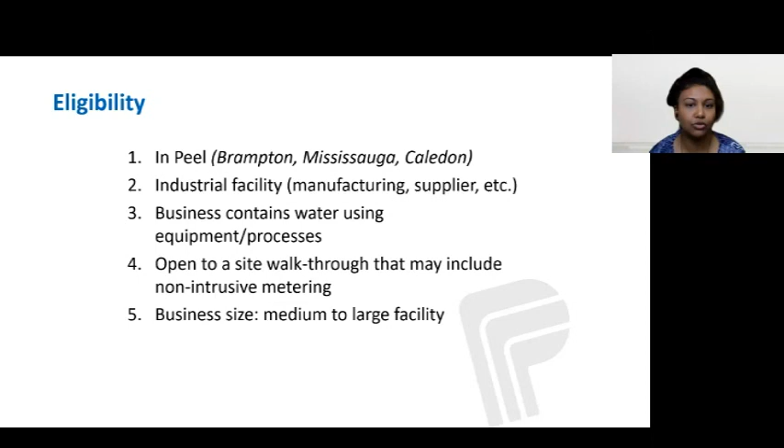Other eligibility requirements are that the facility must be under the industrial category for this specific program, meaning it's in manufacturing, food and beverage, or a supplier of some sort, just to name a few. The business is to contain water using equipment and processes, as our program does not look at energy specifically. And you must be open to a site walkthrough that may include some metering with a flow meter, which may stay at your facility for a few days, up to 2 weeks, depending on the operating hours. Finally, it must be a medium to large size facility. So those are our main requirements for this industrial program.

So if eligibility is confirmed, the application process can be summarized into 8 steps. First, someone from the industry must reach out to the region, either by email, by phone, or the online contact form I mentioned earlier. A virtual meeting will be set up to discuss the program, business details, and scheduling an audit with myself.

Next would be the actual audit on site, where myself and the consultant would meet with a facility staff member very familiar with your plant floor operation and equipment. Metering may occur and might be left on for a period of time. It's a non-intrusive meter, just a flow meter to get minute by minute data. Data will be gathered, and once those meters are picked up, the consultant will create a report highlighting all the findings and recommended water saving opportunities.

The report will be sent electronically for their reference to the business, and it's then up to the business to make any of those changes from the report. There's no specific deadline, but the region would just like to maintain some regular communication regarding your possible next steps. There's no actual obligation. It's really a stepping stone for businesses if they are interested in water efficiency but are just not sure where to start.

And then if the changes are executed, a second audit may be scheduled to determine your actual savings, and a second report would be provided at that time showing those actual savings. Finally, there is a social media option for cross promotion between the business and the region, whether it's through Twitter, LinkedIn, or Instagram, depending on the situation.

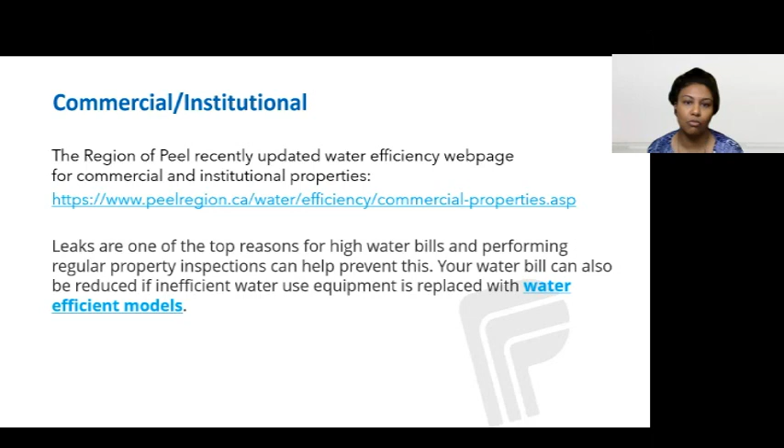So there are six pieces of equipment that we've seen get replaced most often in the commercial and institutional sector, and this is actually provided on our webpage. All the details are there, but I just wanted to go over it so you get a better idea of some of the recommendations we suggest based on what we've seen in the past. So let's start with the first three.

We have walk-in fridge freezer units or condensers, ice machines, and toilets. All of this information is provided on the webpage, but please note that all listed costs are approximate, as savings depend on the level of usage. The values are based on multiple sources spanning online resources, credible reports, manufacturing specs, and historic program data. The approximate values listed include money saved per year, the one-time investment cost, and the water saved per year. As you can see from this list, the average max investment is just under $4,000, with over 200 cubic meters of water savings per year, which can add up quite quickly and significantly.

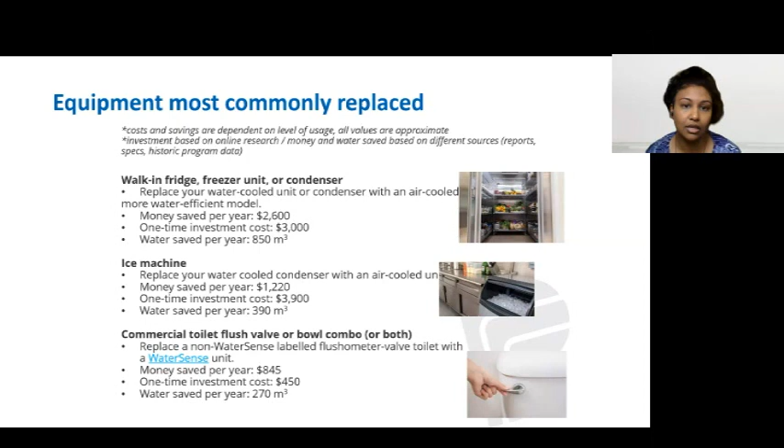So the next three most popular equipment that get replaced at these types of facilities include urinals, pre-rinse spray valves, and dipper wells. Pre-rinse valves, as well as dipper wells, are most commonly found in restaurants. As you can see from this list, the average max investment is just under $500 for this equipment, with over 15 cubic meters of water savings per year.

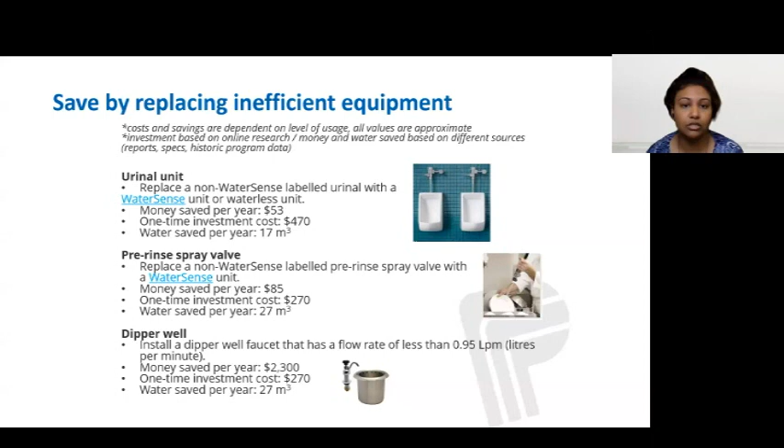You'll note that some of the equipment recommends changing to a WaterSense unit. This is a list of small, water-efficient products in an affordable price range for the vast majority, according to the EPA. The link is provided on our webpage. For example, if you have a certain type of toilet and you're thinking of replacing it, WaterSense products are actually very water efficient and proven to be so. They would be on that WaterSense list. Common brands would be, for example, American Standard and Kohler, just to give you an idea, and to verify those savings. The list also contains outdoor water-using equipment options such as sprinklers for your reference. So if outdoor water usage is a concern, there are some great options on that WaterSense list as well.

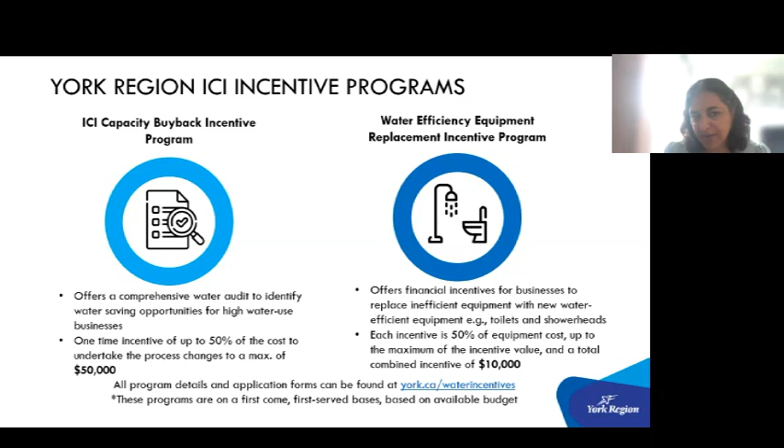Very quickly, I'd like to highlight that the Region of York offers a comprehensive water audit to identify water saving opportunities for high water use businesses through their ICI capacity buyback incentive program. They also offer a water efficiency equipment replacement incentive program, and you can find all the details on their website.

Toronto also has a capacity buyback program for the ICI sector, in addition to an industrial water rate and sewer surcharge rebate programs. Again, you can get more information on their website.

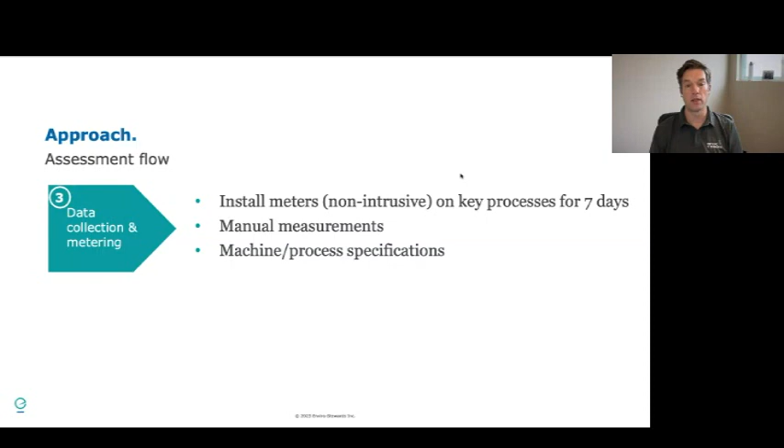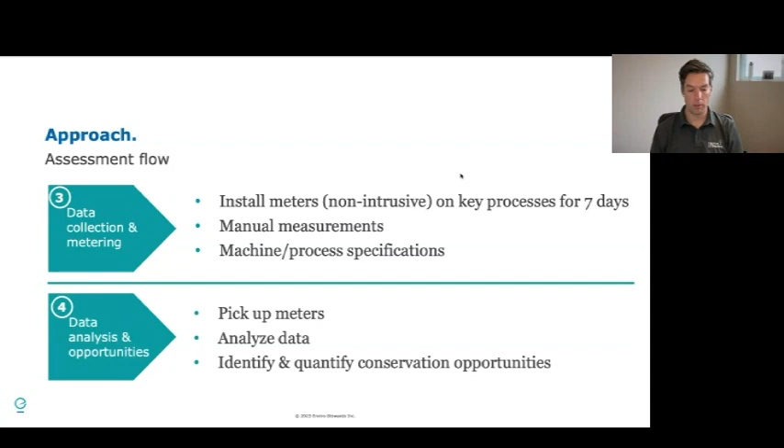We'll then pick up the meters, crunch the numbers, identify what you could change, and quantify what that will result in water savings. That'll be prepared, as Priya mentioned, in a summary report. We'll quantify the savings for you. The report is reviewed by Peel to make sure it meets the program, and then it'll be submitted to the facility. As mentioned, once you implement something, we'd come back and measure the after results. So that's a high-level overview of what to expect during an audit assessment through this program.

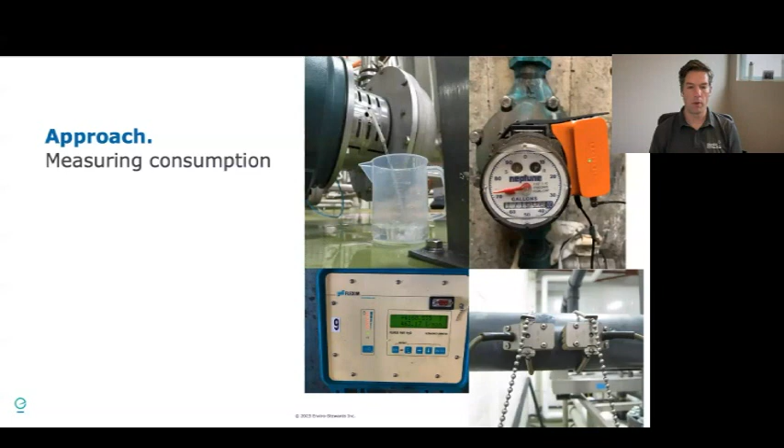So we'll take a look at some case studies, and the first one we're going to look at is Super-Pufft. I'll turn it over to Syed to run through these slides.

Hi, thank you, Lloyd. Hi, everyone. My name is Syed. I work at Super-Pufft.

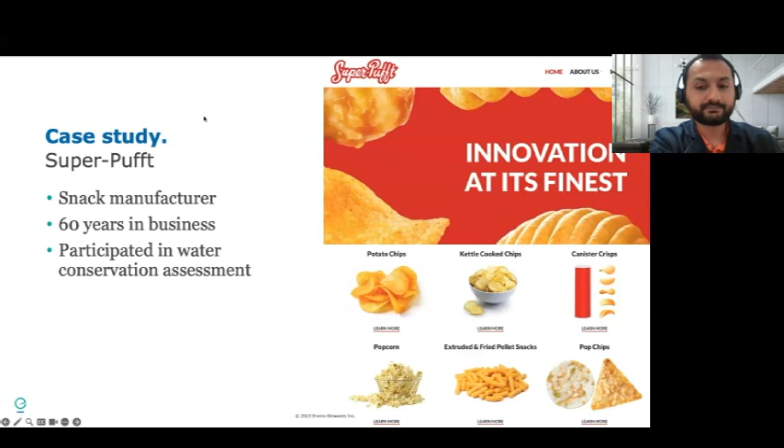I'm going to start with a brief introduction of Super-Pufft. We manufacture snacks, chips - there are a few products not on the slide that we recently expanded into, so now we also produce wafers, cookies, nutter butter wafers, things like that. We're one of the largest snack manufacturers, so obviously we use a lot of water in production as well. Enviro Stewards did a survey for our plant, and they found several places where we could save a lot of water. The 3 cases highlighted in this presentation are the ones we'll cover.

Before we start, let me give you a brief overview of what the process looks like, so you can understand how and why we are saving so much water.

When we make chips, the first thing we do is get potatoes from the fields, which are dirty, so we need to wash them. That uses most of our water. After that, we need to take the peels off, so they go through the peelers, slicers, then get fried and packaged. So the processing side uses quite a lot of water.

The three things that were found by Enviro Stewards were the slicers, the potato receiving jets, and the augers or destoners, which I'll get into when I'm explaining those.

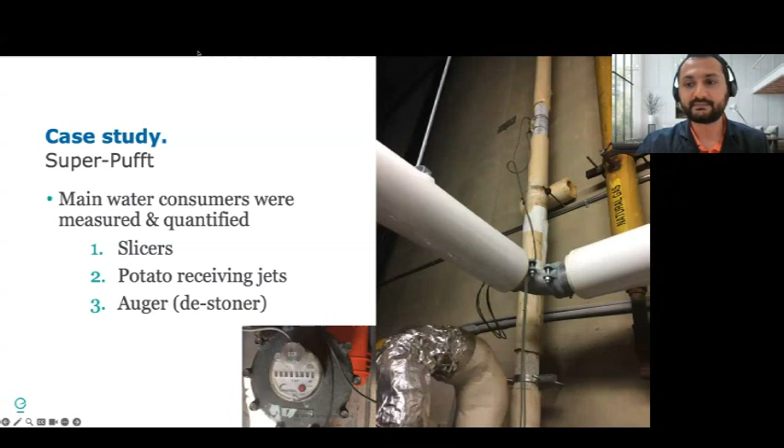The total water saving opportunities that were identified were about $320,000 a year, which is about 123,000 meter cubes of water saving per year.

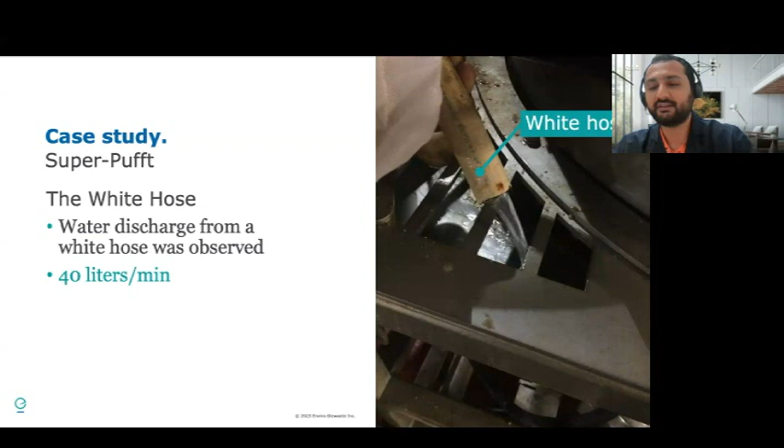So we started by basically just switching it off, because if it's not necessary, then why use extra water? After we switched it off, we found that there was no change in the quality of peeling done by the peeler. It ended up saving about 20,000 meter cubes of water, about $50,000 of water a year. That was a really good one, very easy to identify, and it saved us a lot of money without compromising on the quality of our product.

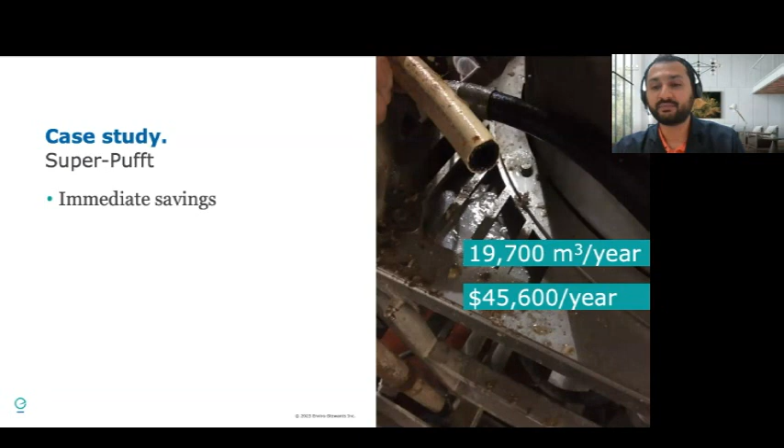After peelers, our peeled potatoes go into the slicers. These slicers cut them into whatever shape, whether ripple cut or other kinds of chips, and we need a constant flow of water. The slicer works with water flowing from the top, potatoes falling onto it, and a rotor moving. You need to add water so potatoes don't get stuck and flow out efficiently.

With this one, there is a jet of water right on top of the slicer. When we measured the amount of water going through it, it was about 40 liters a minute through one jet. This was on one of our slicers, PC26 — we call it that because it has a capacity of about 2,600 pounds an hour of potatoes going through the slicer.

Once this was identified, we did not want to affect our processing by reducing it without knowing the outcome, so we contacted Urschel, the manufacturer of these slicers. We found out that the recommended flow rate of water for the slicers to work efficiently is between 8 to 10 liters a minute. So we were using about 4 times the water, or 400% more, on these slicers.

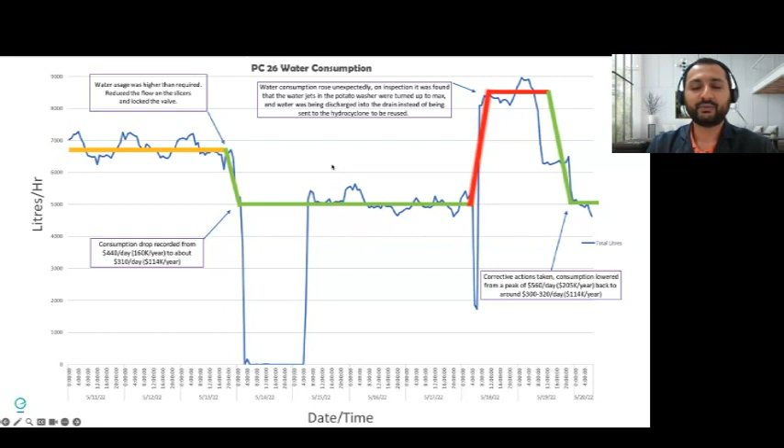So for this one, like I said, we need to keep verifying and keep looking into the changes we made to ensure they're not undone. So what we ended up doing was taking the valve handles off the valve so no one could change it after we reduced it. That's just a little insight on what we did.

Again, sometimes we have opportunities where we can reuse the water, not just eliminate use for it. Sometimes we're sending water to the sewers which actually has more potential of being used in other places - this is one of those cases.

In this one, all the water going through to our drains, we divided into separate channels. We have a separate channel for all the water going through the slicers, the potato washing, and everything - that water goes through a separate drain to our centrifuge. A centrifuge is basically rotating equipment which uses centrifugal force to remove solids from it - it's waste treatment equipment. We send the water to the centrifuge to eliminate the starch it carries from our potatoes. All of that accumulates and we send it to the centrifuge. From there, the centrifuge removes the solids, which is the starch, and we get dry powder which can be used elsewhere. The centrate that comes out is relatively clean enough that it can be discharged directly into the drains without further treatment.

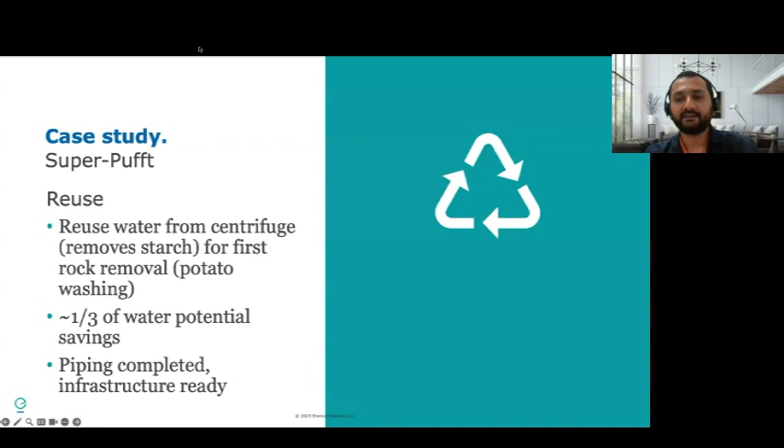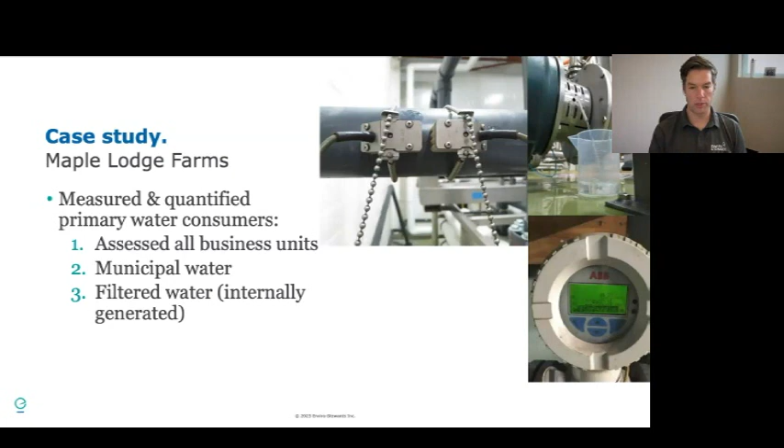So I'll just go through the final case study briefly. It's Maple Lodge Farms, a local company that makes a variety of chicken products. We assessed all their business units. They had several as part of one large facility. Their main water uses were municipal water and some filtered water, generated through internal processes. Overall, they saved almost 20% in municipal water, and about 37% in their filtered water.

They were so excited about the results that they implemented right away, just a month after the assessment, which is always great to see. They also included energy with the water, and they saved over $3 million per year for their facility. Quite significant savings, with a payback of under 2 years on average.

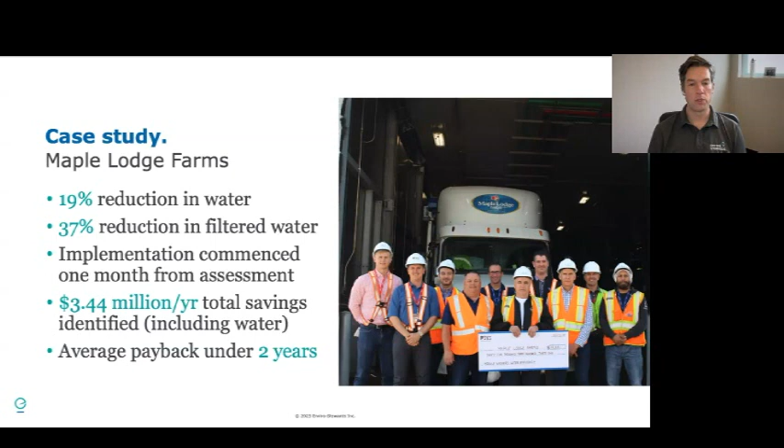Thank you, Lloyd and Syed, for providing all these interesting details and water saving opportunities to make a business case to conserve water. We do have quite a few questions, but I also encourage everyone to continue to add questions to the Q&A box. So I'll get started on the questions. The first one is probably for Fariha.

If multiple recommendations are presented in the audit report, do we have to implement all of them? Great question. No. For example, if we do an on-site audit and 5 recommendations were made - change this equipment, make this process change, and a few other options - there's no obligation to make all of those changes, because we understand it might not be possible. There's a large company investment that goes into making these changes, and every year looks different. So even timing-wise, it's not like once we do an audit, we expect at least one change to be made in 6 months. That's not the case. This is really just a stepping stone, a resource for businesses that want to conserve water but might not know where to start. So we want to offer some resources on our end, but absolutely no obligation to make all the changes, even any of the changes. But ideally, we would want to see some progress towards water efficiency.